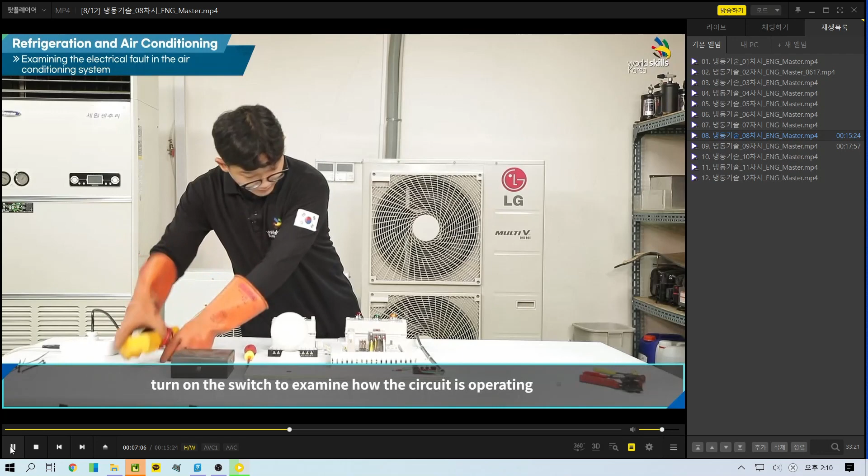Check if there is any electrical leakage at the inner part of the circuit and if the ground connection is properly conducted. After confirming electricity is flowing into the circuit, turn on the switch to examine how the circuit operates. Due to the electrical flow inside the circuit, the equipment must be checked with rubber insulation gloves for the safety of the operator. Check whether the power and operation lamps properly work and the light bulb used for loading on behalf of the motor is operating normally.

The process of finding and repairing the fault: disconnect the power from the main electrical circuit and cut the wires intentionally to open the circuit, causing a failure. At the part where the worker has just cut the wires, the failure is caused by disconnecting the wire that is connected to the magnetic switch.

To check if there occurs any fault in the machine, supply power to it again. When connecting the power, you must wear rubber insulated gloves and conduct the power voltage test. Measure the voltage at the power outlet so that the accurate voltage can be supplied to the 220-volt line and 0-volt line on the diagram.

지금 요 내용을 조금 설명을 좀 드릴게요. 지금 저희 작업자가 자꾸만 플러그, 멀티 콘센트 플러그 계속 여기를 이제 점검하는 장면이 나오는데, 요거는 실질적으로 220볼트가 이제 장비에 투입이 되는지 그거를 이제 확인하기 위한 것이고요. In the video clip, the worker keeps checking the power outlet by conducting the test to see if the 220 volt is applied to the actual system or unit.

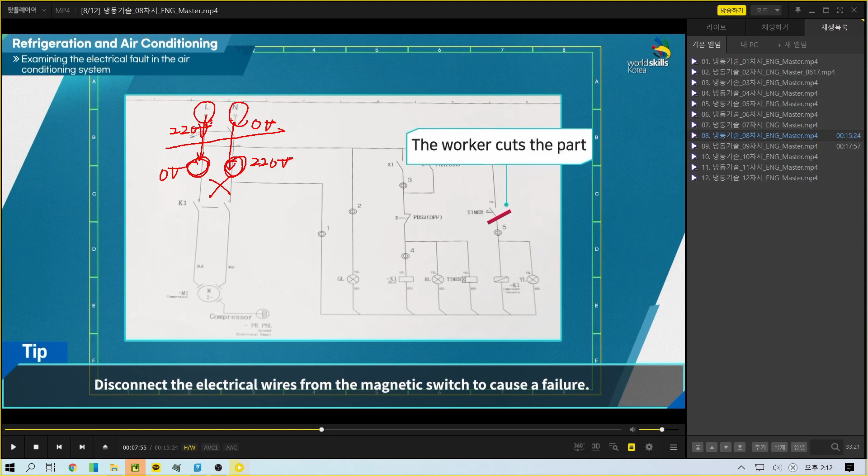This is exactly the part about what I mentioned. 여러분들이 지금 동영상을 보시면서 나레이션 설명하는 거하고 화면하고 조금 정확하게 맞아 들어가지 않고 좀 다른 작업을 하는 것처럼 보이는데 그냥 참고하시면서 편안한 마음으로 보시면 되겠습니다. There is some delay between the actual simulation of the worker in the video clip and the narration or subtitles, so please understand this point when watching the video clip.

네, 다시 진행을 하겠습니다. Let me move to the next step. Before applying power, inspection for leakage and short in the circuit must be conducted using a multimeter.

If you confirm that there is no leakage or short circuit, turn on the switch to check the operation of the circuit. Inspect that the light bulb for loading does not turn on properly, unlike the normal state.

Using a digital multimeter, check which part of the circuit has the problem. Inspect the magnetic switch area first because the bulb is not lit and the magnetic switch is not working. If the voltage is applied to the magnetic switch, but the magnetic switch does not work, it can be identified as a failure of the magnetic switch itself.

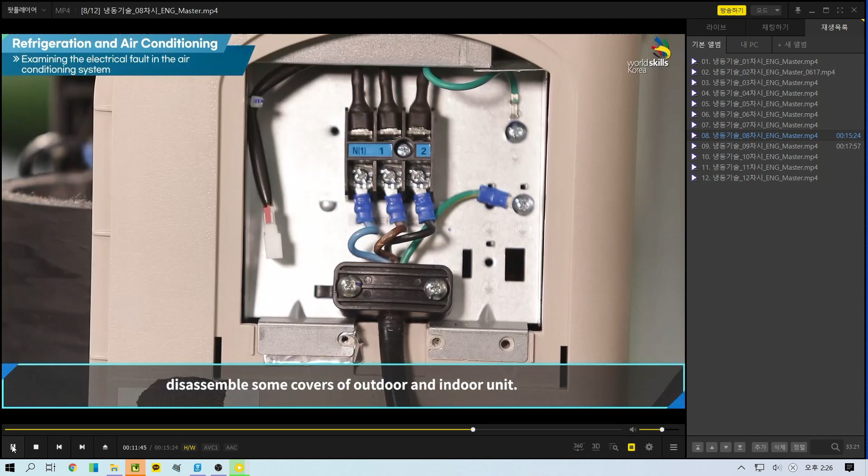To check the diagram and wiring of the air conditioning unit, disassemble some covers of the outdoor and indoor unit. Using a digital multimeter, conduct the continuity test on terminals L and N.

Ground continuity inspection, earth insulation inspection, and interline insulation between L and N phases are conducted sequentially. If the resistance value between the two terminals is abnormal, it can cause fire due to damage of the circuit breaker trip and electrical components breakage or sparks. Therefore, check for any problems before supplying power.

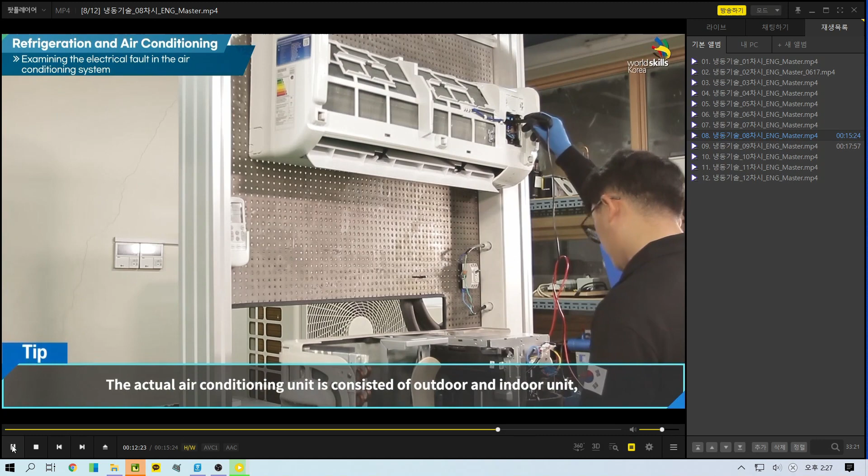The actual air conditioning unit consists of an outdoor and indoor unit, so there is also a communication wire connecting the two. Be sure to inspect not only the main wire of the machine, but also the communication wire.

The refrigeration unit usually consists of several basic control circuits that are operated by their own sequence, which operates following the whole sequence again.

What is a sequential control? It is a control system which proceeds step by step according to a set sequence. If power is supplied with a switch, it operates the load according to the conditions of the auxiliary relay in the circuit or the switch.

If the circuit test is completed, put the covers on the machine again and supply power.

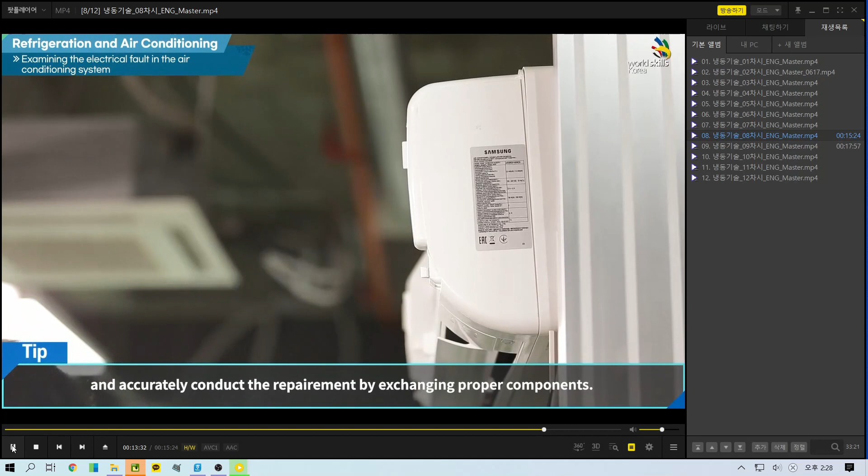Control systems for refrigeration systems and air conditioners are divided into main and auxiliary circuits. If you conduct the design and wiring by distinguishing each circuit part and control part, you can easily find the fault when the control system of the refrigeration unit has a problem, and accurately conduct the repair by exchanging proper components. The actual wiring diagram might use a different operation method and components depending on the designer's intention and purpose. So be sure to understand the control system by checking the wiring diagram provided by the manufacturer.

Before supplying power, make sure to conduct the power voltage test so that the accurate voltage can be provided.

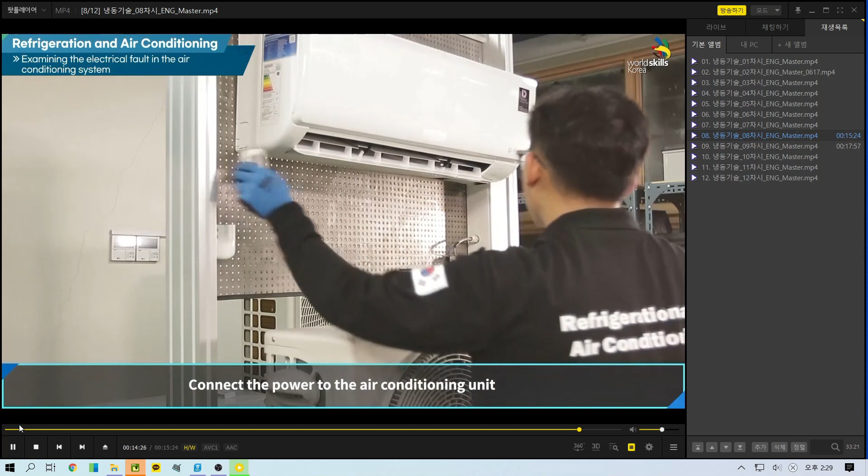Connect the power to the air conditioning unit and operate it to check if it works without any problems.

Main focus of the task in this training is as follows. First, to reduce errors in data, examine the problem with several trials instead of finishing it with a single trial. Second, testing instruments such as digital thermometer must measure the same points during both normal operation and fault finding. Third, when measuring wind speed, it is necessary to measure the wind volume at several places as much as possible, rather than only one place, and to make an average value. Fourth, when installing a manifold gauge, install it where the refrigerant in the hose can be reclaimed. Fifth, after the repair is completed, competitors should always check if the machine operates properly. Sixth, to figure out the reason for the fault, it is necessary to train workers by comparing the normal refrigeration cycle and the refrigeration cycle which has a mechanical fault. Please check the preparations and tools for this training.

These are precautions. First, before repairing the fault, competitors should attach a danger sign at the end of the power cord. Second, since this work deals with the refrigerant, make sure to wear safety gear to prevent low temperature burns.

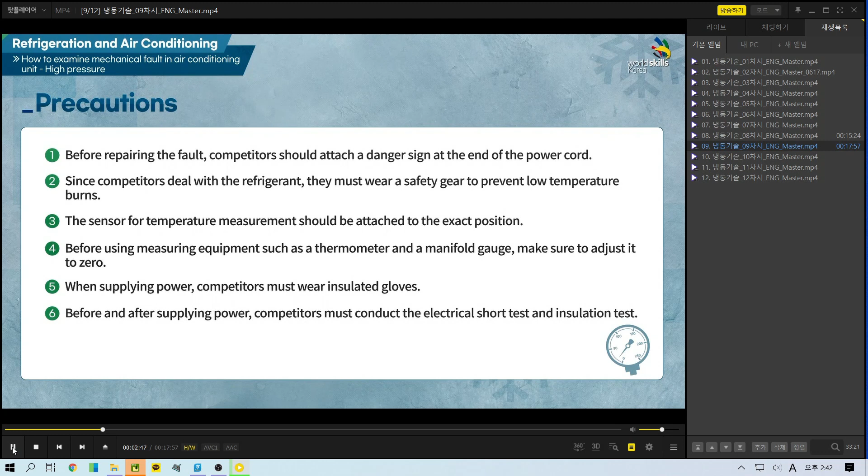Third, the sensor for temperature measurement should be attached to the exact position. Fourth, before using measuring equipment such as a thermometer and a manifold gauge, make sure to adjust it to zero. Fifth, when supplying power, make sure to wear insulated gloves.

Sixth, before and after supplying power, make sure to conduct the electrical short test and insulation test. Seventh, the likely cause of failure is high pressure, so be careful of changes in high pressure. Eighth, operating faulty equipment for a long time to find the fault can lead to additional damage to the machine. Ninth, care must be taken in insulating the sensor parts so that the temperature measurement data values are not affected by external factors.

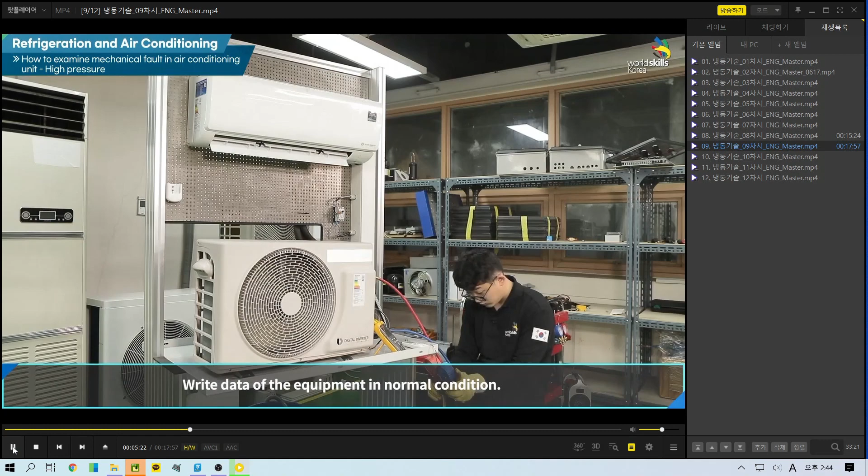Examining the normal operating condition. Write down the data of the equipment in normal condition. Measure and write down the compressor operating current, the air velocity of indoor and outdoor unit, the high and low operating pressure, the superheat, and the subcooling.

When measuring the air velocity of indoor or outdoor unit, divide the inlet or outlet of the indoor or outdoor unit into 4 to 6 sections, and measure the air velocity in each divided section to get an averaged value. If you multiply the average value with the area of the indoor unit, you can get the air volume of the machine.

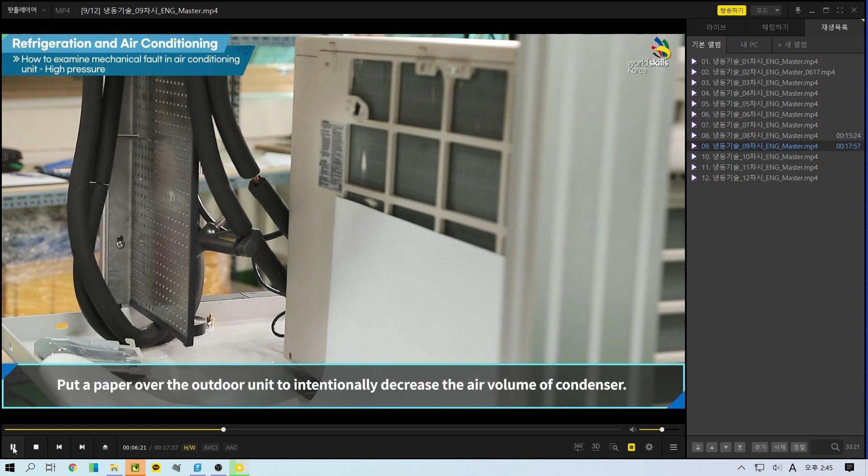The situation of the fault regarding the decreased air volume in condenser. Put a paper over the outdoor unit to intentionally decrease the air volume of the condenser. Check how the data gets changed compared to the data from the normal machine.

There can be several reasons for the decreased air volume of the outdoor unit, but it commonly experiences an abnormal increase in the discharge pressure, which is a high pressure part.

Reasons for the decreased air volume of the outdoor unit: when the motor does not rotate properly because of a functional problem in the motor; when the wing of the fan is damaged; when the fins on the suction side of the outdoor unit are clogged with foreign substances; when the outdoor unit is placed in a problematic location.

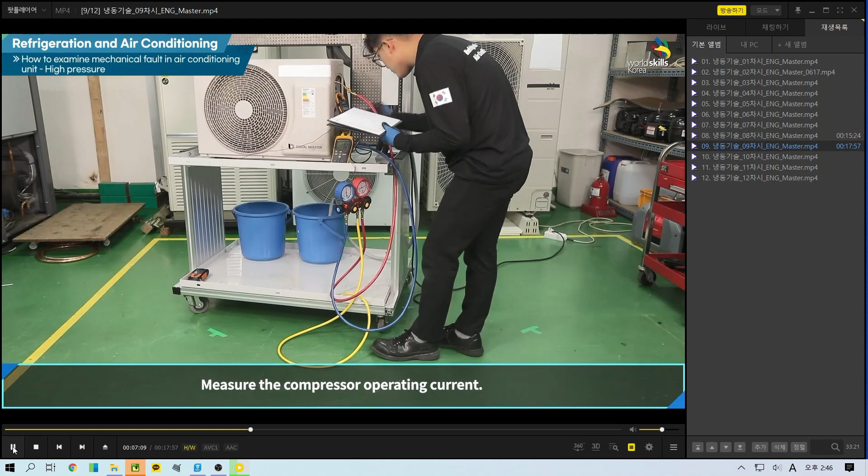Measure the compressor operating current. High pressure rises due to a lack of heat exchange, causing the compressor operating current to rise as well.

If the place where the condenser is installed is not ventilated and has a lot of dust, the contaminants will stick to the refrigerant pipe and cooling fin. In this case, the heat does not exchange, raising the high pressure.

If a leaf or a paper is stuck to the condenser, the heat does not exchange as well. As a result, condensation will not take place well, and the pressure at the high pressure part will increase.

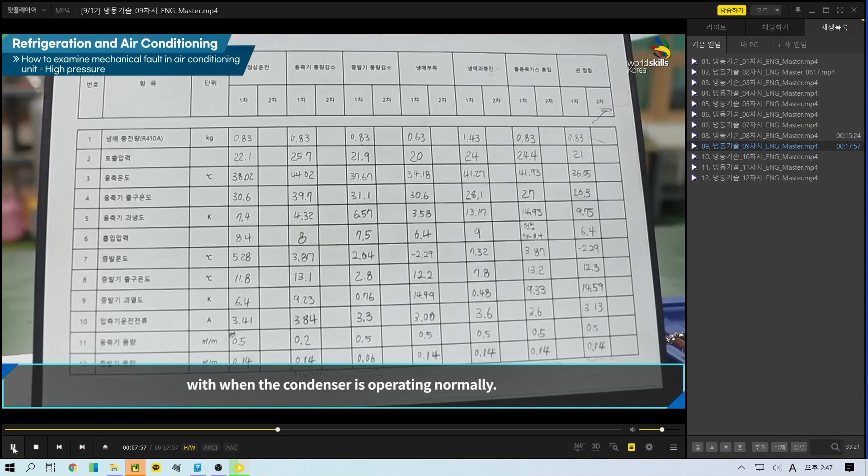Let's compare the data of when the air volume of the condenser is decreased with when the condenser is operating normally. Check for any noticeable changes.

Increase in discharge pressure. Increase in compressor operating current. Decrease in air volume of condenser. No change in the degree of supercooling of the condenser. No change in the degree of superheat of the evaporator.

The reason for the data change is because the heat exchange is not taking place properly at the condenser. The condensing medium of an air-cooled condenser is the air that exchanges heat. If the air volume is not adequate, the condensing efficiency decreases and the discharge pressure increases.

If the condenser is placed close to a wall or any other obstacle, the hot air discharged after the heat exchange gets sucked in again, making the heat exchange ineffective.

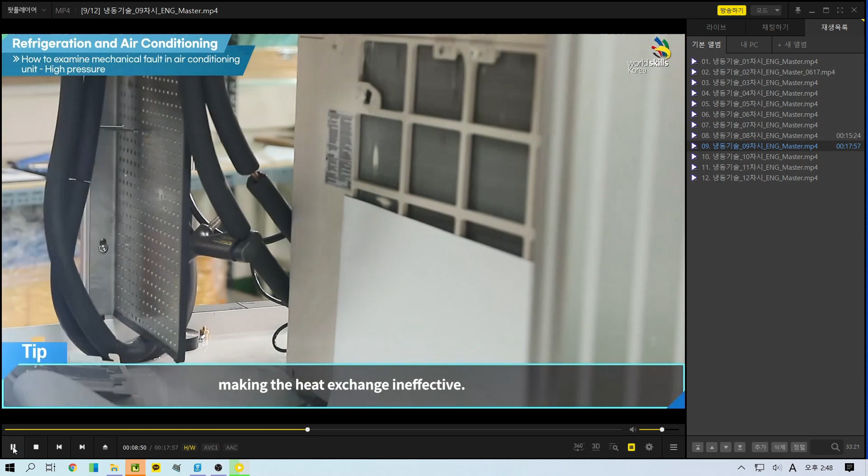When there occur symptoms such as the increase in discharge pressure, the increase in operating current, and the decrease in the air volume of the condenser, contamination in the condenser or faulty condensation is assumed to be the reason for the fault. In this case, there is no change in the degree of supercooling of the condenser and the degree of superheat of the evaporator.

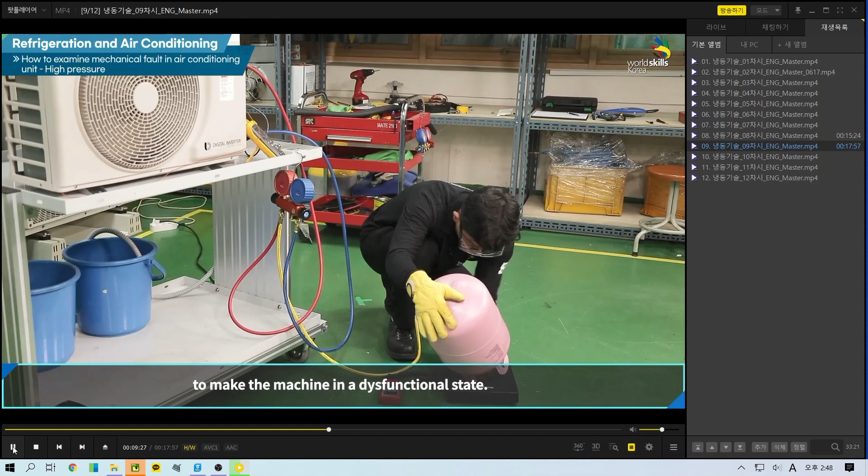The situation of the fault regarding refrigerant overcharging. Overcharging the refrigeration system with refrigerant intentionally makes the machine dysfunctional. The overcharged amount of refrigerant is 600 grams.

Check how the data gets changed compared to the data from the normal machine. Measure the discharge pressure and the suction pressure during operation. If the refrigerant is overcharged in a refrigeration cycle, the discharge pressure gets abnormally high.

Measure the temperature of the condenser outlet. Although the temperature dropped only a little bit, the degree of supercooling changes considerably due to the change in discharge pressure. Measure the compressor operating current.

The operating current is higher than normal.

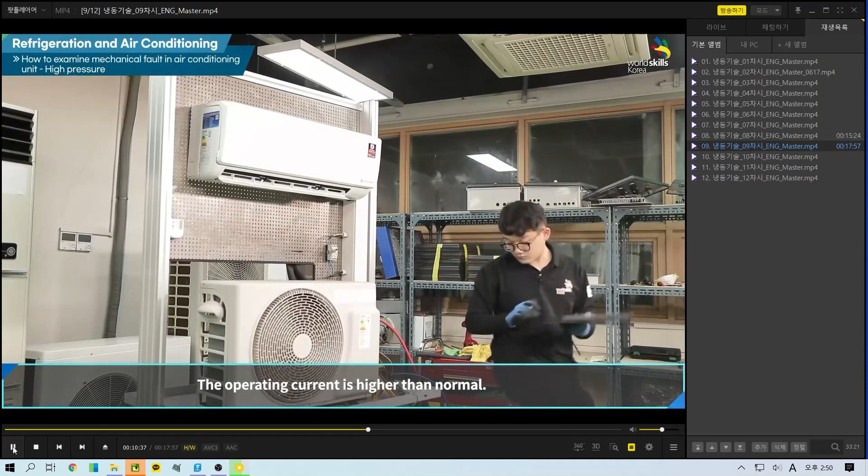Let's compare the data of when refrigerant is overcharged with when the machine operates normally. Check for any noticeable changes. Refrigerant is overcharged 600 grams more than the normal amount.

Increase in discharge pressure. Increase in the degree of supercooling of condenser. Decrease in superheat of evaporator. Increase in compressor operating current. Normal air volume of the condenser.

It is because of the excessive amount of liquid refrigerant that had accumulated on the condenser, decreasing the capacity of the condenser. It is because the part of the condenser where the liquid refrigerant is filled cannot work properly as a condenser. Therefore, when the subcooling increases excessively, the liquid refrigerant which was unable to be evaporated keeps flowing into the compressor.

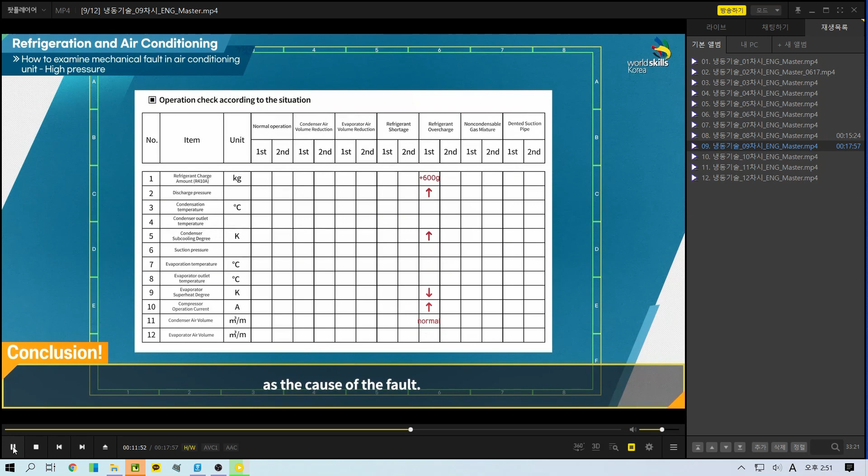When there occurs symptoms such as the increase in discharge pressure, the increase in subcooling of condenser, the decrease in superheat of evaporator, and the increase in compressor operating current, the refrigerant overcharging is assumed as the cause of the fault. In this case, there is no change in the air volume of the condenser.

The situation of the fault regarding the mixed-in non-condensable gas. Inject some nitrogen gas into the refrigeration system intentionally to make it in a dysfunctional state.

When non-condensable gases such as air are collected in the condenser during piping, the condensation volume of the condenser is reduced due to the non-condensable gases, which results in higher discharge pressure than the pressure corresponding to the condensation temperature of the refrigerant vapor. Check how the data gets changed compared to the data from the normal machine.

While the machine is operating, measure the discharge pressure, the temperature of condenser outlet, the suction pressure, the temperature of evaporator outlet, the compressor operating current, and the air volume of both condenser and evaporator using a manifold gauge.

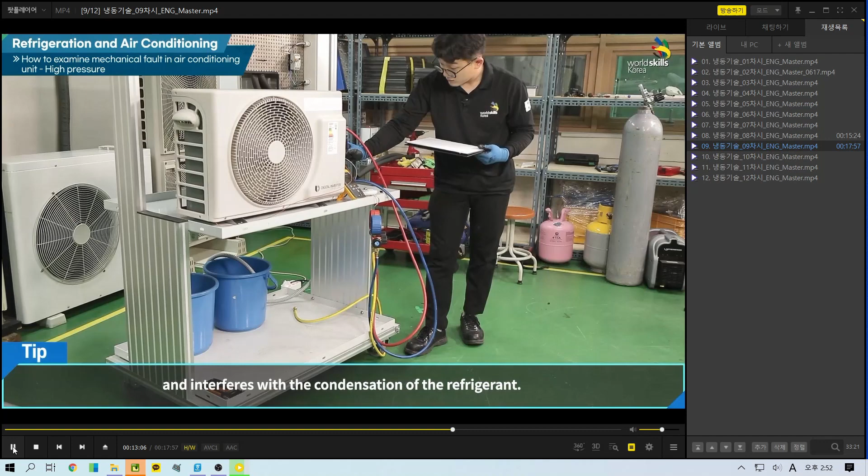Why non-condensable gas can cause some problem. It is because non-condensable gas gathers at the upper part of condenser and interferes with the condensation of the refrigerant. If the amount of non-condensable gas increases, the heat exchanging area decreases, hindering the heat exchange efficiency and the condenser's performance.

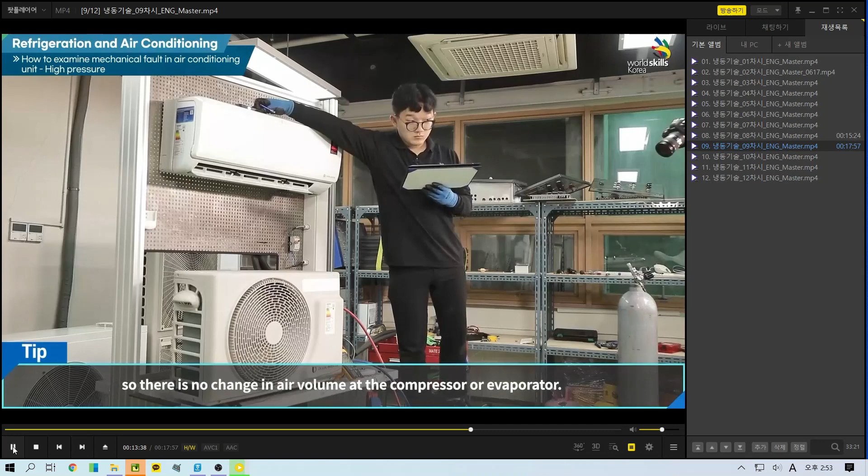Therefore, it can be the cause of decreasing the refrigerating ability since it increases the condensing pressure, increasing the shaft power of compressor as well. However, there is no obstruction at the part where the wind goes out, so there is no change in air volume at the compressor or evaporator.

Let's compare the data of when some non-condensable gas is mixed in with when the machine is operating normally. Check for any noticeable changes. Increase in discharge pressure. Increase in subcooling of condenser.

Suction pressure hunting phenomenon. Increase in superheat of evaporator. Increase in compressor operating current. No change in the air volume of the condenser.

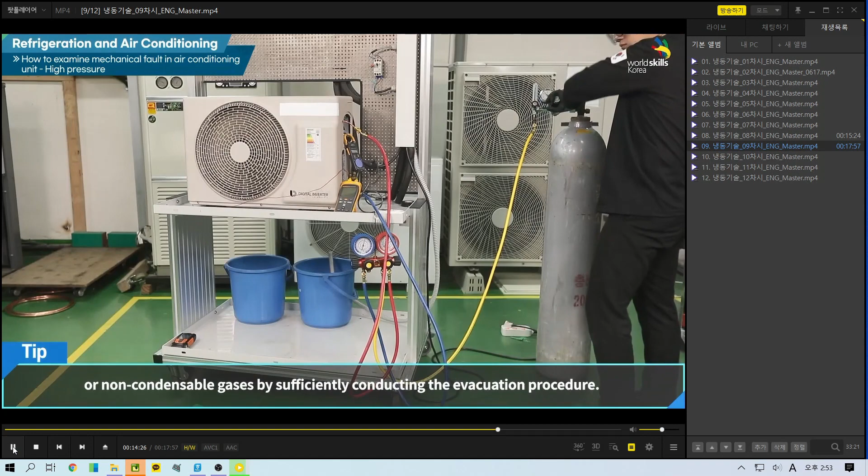To prevent some non-condensable gases from being mixed in, seal the refrigerant piping system properly and make sure there is no remaining air or non-condensable gases by sufficiently conducting the evacuation procedure. When the refrigerant is being charged, be careful so that no air or moisture is mixed in.

When there occurs symptoms such as the increase in discharge pressure, the increase in subcooling of condenser, the suction pressure hunting phenomenon, the increase in superheat of evaporator, and the increase in compressor operating current, the mixed-in non-condensable gas is assumed as the cause of the fault. In this case, there is no change in the air volume of the condenser.

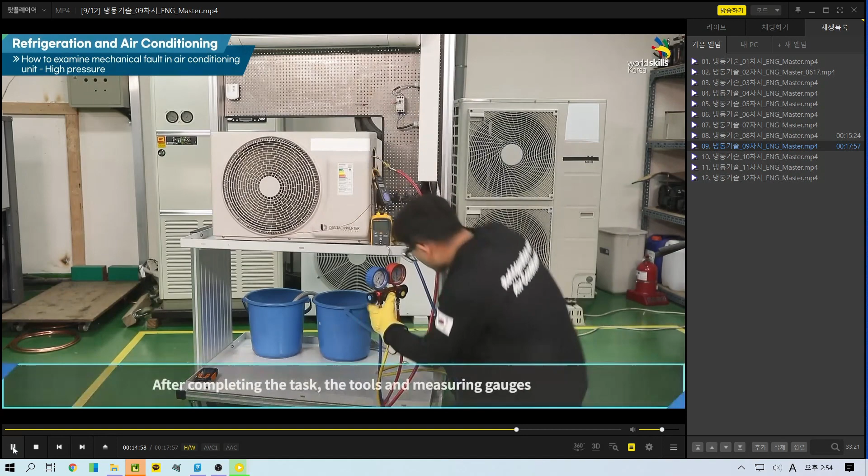After completing the task, the tools and measuring gauges used for examining and repairing the fault should be removed. All sorts of covers or caps that were disassembled, such as a pressure controller and joint box, should be reassembled to the original state.

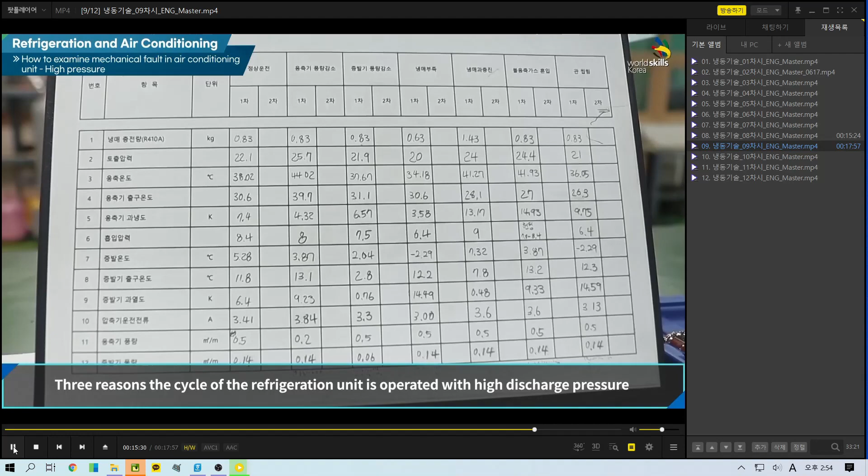We have reviewed 3 reasons the cycle of the refrigeration unit is operated with high discharge pressure. There are three main reasons why the cycle of the refrigeration unit is operated with high discharge pressure: decreased air volume of condenser, refrigerant overcharging, and mixed-in non-condensable gas.

There are differences in the measured data depending on the three reasons above. If the condenser air volume decrease is the cause, it shows problems such as increase in discharge pressure, increase in compressor operating current, and decrease in air volume of condenser. No change in the degree of supercooling of the condenser. No change in the degree of superheat of the evaporator.

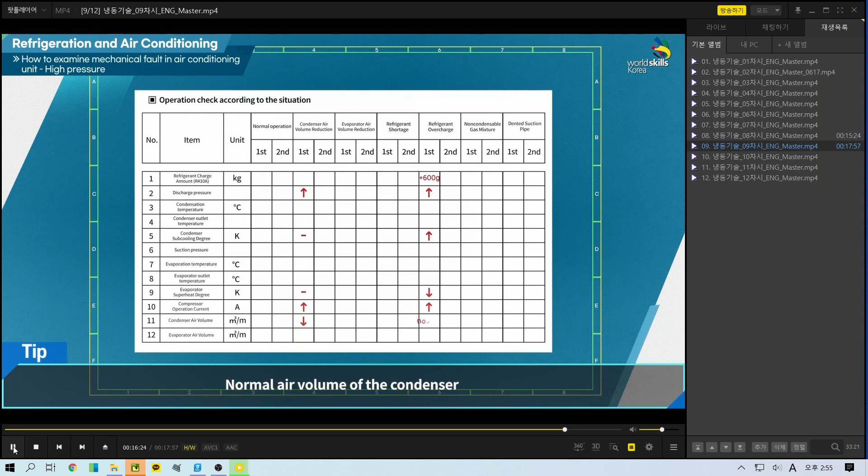When the refrigerant is overcharged: increase in discharge pressure, increase in subcooling of condenser, decrease in superheat of evaporator, increase in compressor operating current, but the air volume of condenser is normal. When some non-condensable gas is mixed in: increase in discharge pressure, increase in subcooling of condenser, suction pressure hunting phenomenon, increase in superheat of evaporator, increase in compressor operating current, no change in the air volume of the condenser.

Even if the discharge pressure is high, there can be a difference in the specific data depending on the situation. In order to quickly find the fault and its reason, it is necessary to understand the problems that occur according to situations and to be trained repeatedly by comparing the difference in the measured data.

After checking the data sheet on the video screen, I'm going to give you additional explanation on it.

As shown in the table, first we have the normal condition data. The first part of the data sheet is about the normal operating conditions, and it is going to be measured 2 times.

I recommend following the procedure from the left section to the right section. Before dividing the faults depending on the high pressure change or the low pressure change, during training I recommend you follow this procedure from left to right.

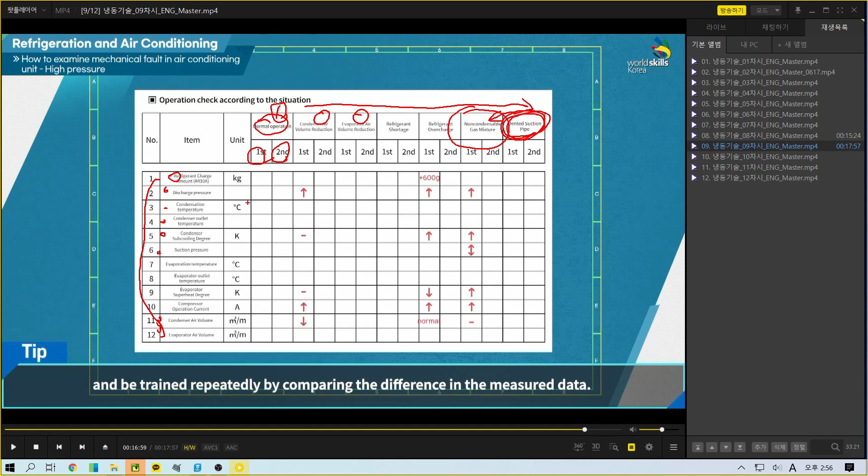So from the top to the bottom, it's all about the discharge pressure, suction pressure, and air volume, etc. Please check all the contents of the items I just marked on the data sheet, and then add some items or delete some items if you need to design the unique individual data sheet for the training.

Now let's finish with the high pressure section and move on to the low pressure section. Let us finalize the fault finding parts of the high pressure part.

Since the low pressure section overlaps a lot with the high pressure section in the beginning - the procedures and precautions repeat - we'll skip ahead to the low pressure part. So now it is about the fault finding task of the low pressure part, but there is a lot of repeated content similar to what you just saw in the previous video clip, so I'm going to skip a few parts.

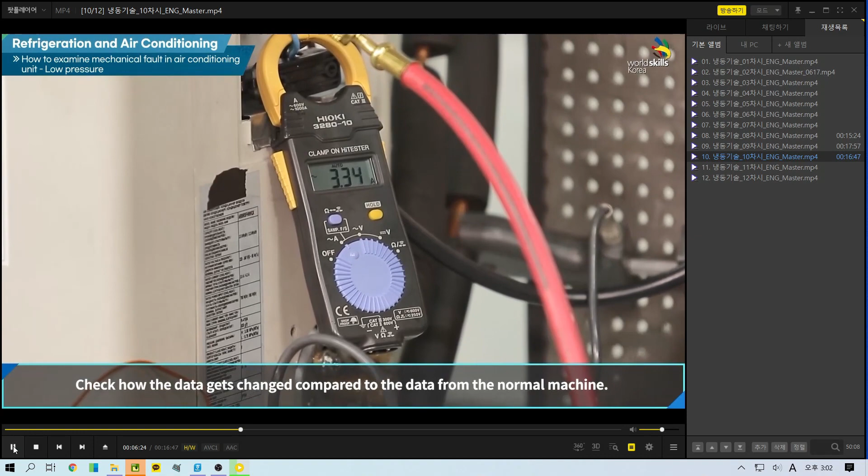Measure and write down the compressor operating current, the air velocity of indoor and outdoor unit, the temperature of evaporator outlet, the temperature of condenser outlet, the high and low operating pressure, the superheat, and the subcooling.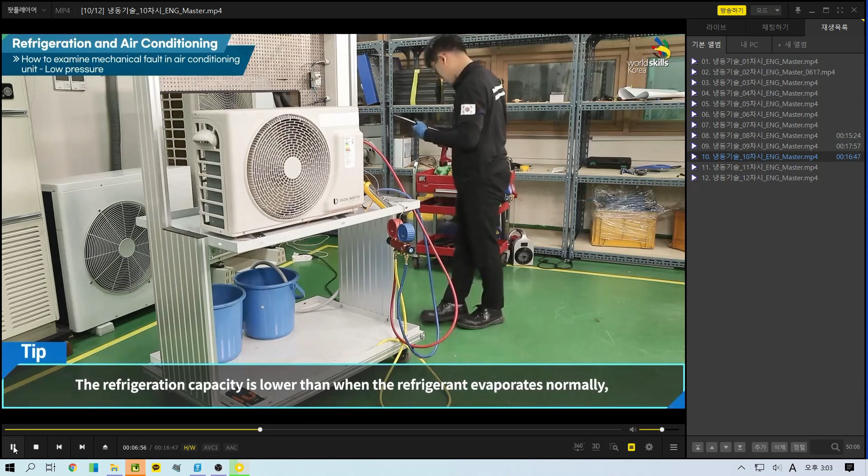If the air volume through the evaporator is abnormally insufficient, the refrigerant flowing in the coil will not evaporate properly. The refrigeration capacity is lower than when the refrigerant evaporates normally, and the refrigerant that is not evaporated is inhaled to the compressor side, which causes failure.

There are many reasons that reduce the air volume of evaporator. First, there is a case where the air filter or evaporator on the suction side of the indoor unit has foreign substances or dust, decreasing the air volume. In addition, there is a case where the evaporator is not operating in normal RPM because of the broken motor. There is a case where the wing of fan is broken. And there is a case where objects interfere with the airflow in the inlet and outlet of the indoor unit.

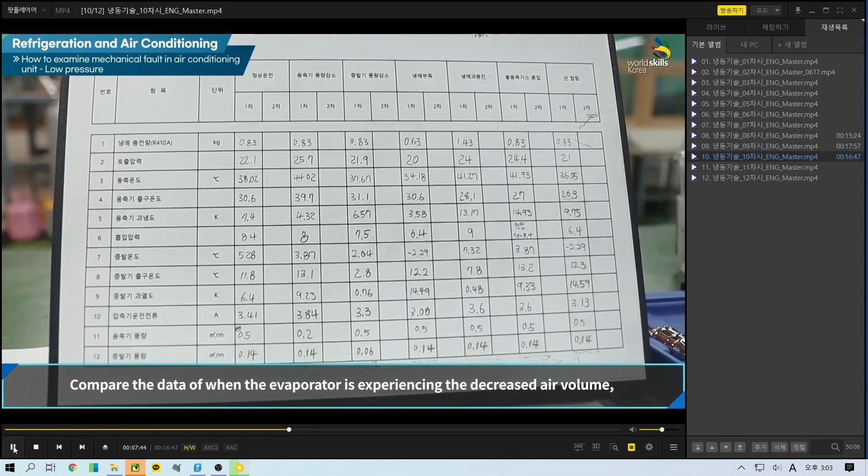Therefore, when the evaporator is experiencing decreased air volume, make sure to measure the air volume. Let's compare the data of when the evaporator is experiencing decreased air volume with when the machine is operating normally. Let's check for any noticeable changes.

Decrease in suction pressure. Decrease in superheat of evaporator. Decrease in air volume of evaporator. Decrease in subcooling of condensers. Decrease in operating current. The reason for the data change is because the heat exchange is not taking place properly

at the indoor unit. Therefore, make sure to conduct overhauls and maintenance on the machine thoroughly to prevent the blockage in air filter and the contamination in refrigerant pipe and cooling fin of the evaporator, and to make evaporator fans

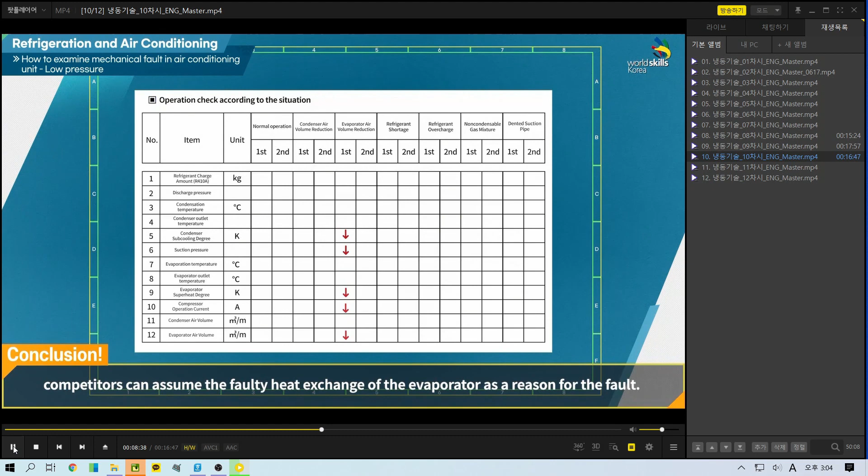operate properly. When there occur symptoms such as the decrease in suction pressure, the decrease in superheat of evaporator, and the decrease in air volume of evaporator, the faulty heat exchange of the evaporator is assumed to be the reason for the fault.

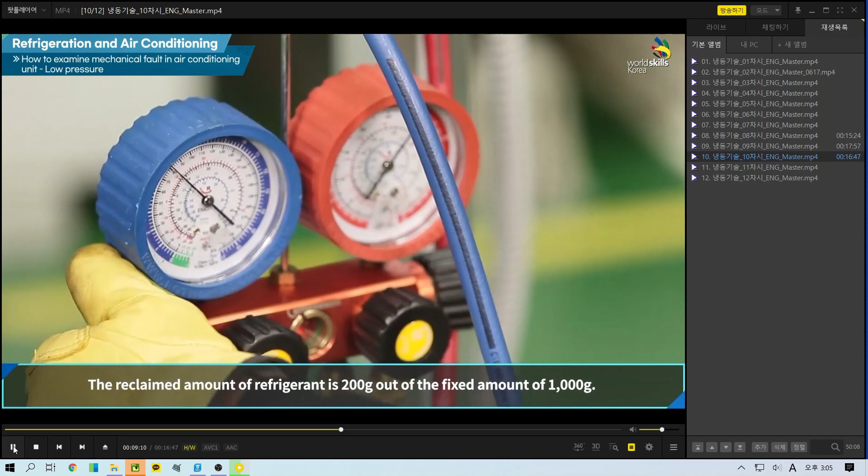This is a malfunction due to insufficient refrigerant. Reclaim the refrigerant from the refrigeration system intentionally to make it in a dysfunctional state. The reclaimed amount of refrigerant is 200 grams out of the fixed amount of 1,000 grams. Check how the data gets changed compared to the data from the normal operation.

Measure the compressor operating current, the temperature of evaporator outlet, the temperature of condenser outlet, the high and low operating pressure.

Insufficient refrigerant may result in a decrease in both suction and discharge pressure. In addition, the increasing superheating degree of the system causes compressor failure due to overheating and deterioration of the freezing capacity. Measure and record the air velocity of the indoor and outdoor units.

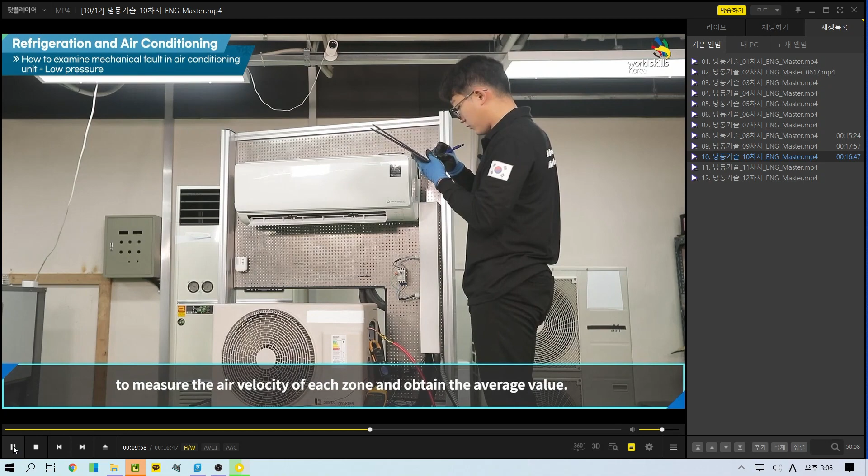When measuring air velocity, the air inlet or outlet of the indoor and outdoor units shall be divided into 4 to 6 equal parts to measure the air velocity of each zone and obtain the average value. Let's compare the actual value of when there is a lack of refrigerant with when the machine operates normally. Check for any noticeable changes.

The reclaimed amount of refrigerant is 200 grams. Decrease in discharge pressure. Decrease in subcooling of condenser. Decrease in suction pressure. Increase in superheat of evaporator. Decrease in compressor operating current.

When there is a lack of refrigerant of refrigeration equipment, as well as the measured data, if a sight glass is installed, bubbles are visible in the liquid refrigerant.

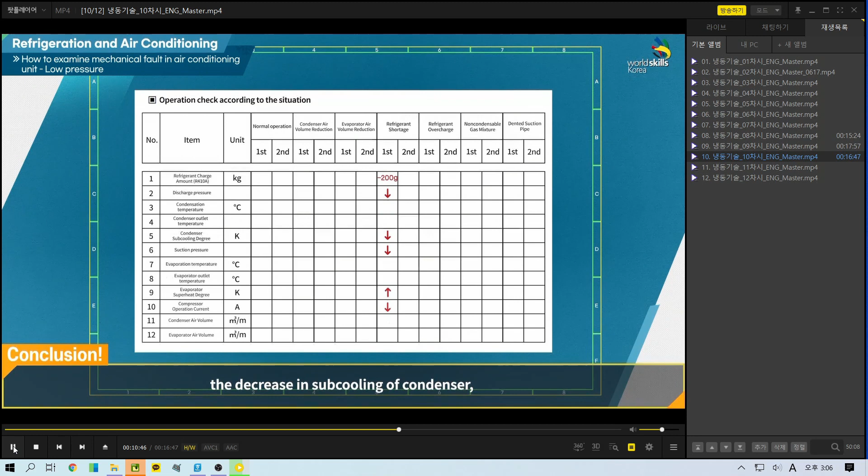Therefore, when there occur symptoms such as the decrease in discharge pressure, the decrease in subcooling of condenser, the decrease in suction pressure, the increase in superheat of evaporator, and the decrease in compressor operating current, the lack of refrigerant is estimated to be a reason for the fault.

This is the situation where the pipe is dented. Distort the pipe of the refrigeration equipment intentionally to make it in an abnormal dysfunctional state where the refrigerant flow is hindered.

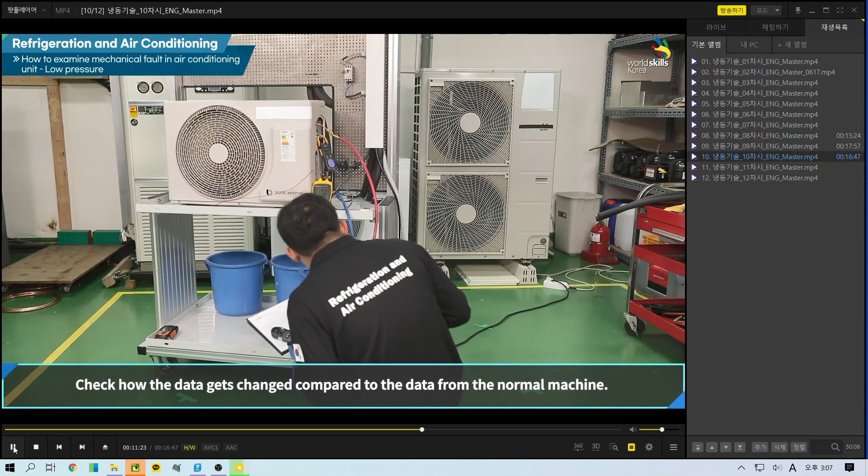Check how the data gets changed compared to the data from the normal machine. Measure discharge pressure and suction pressure during operation. If the refrigeration circulation is hindered, only a small portion of the refrigerant goes through the evaporator, resulting in lower suction pressure.

Measure the temperature of evaporator outlet and the temperature of condenser outlet. When the filter dryer in the liquid tube is blocked, the outlet temperature is lower than the inlet temperature due to the difference in pressure between the inlet and outlet of the filter dryer. Similar problems occur when the liquid line is blocked or bent.

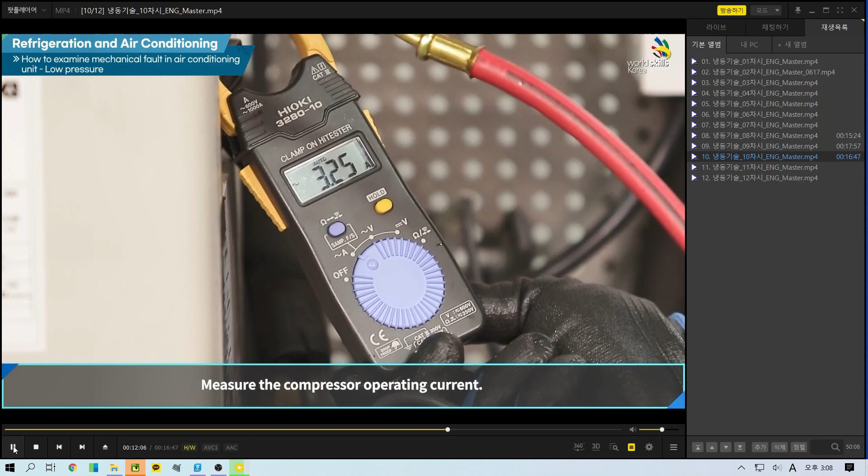Measure the compressor operating current. If the refrigerant does not flow smoothly, the pressure at the low pressure part gets low, which causes the low pressure controller to operate and stops the refrigeration equipment.

Measure and write down the air velocity of the indoor and outdoor unit. When measuring the air velocity, divide the air conditioning unit into 4 to 6 sections, measure each section, and calculate the average value.

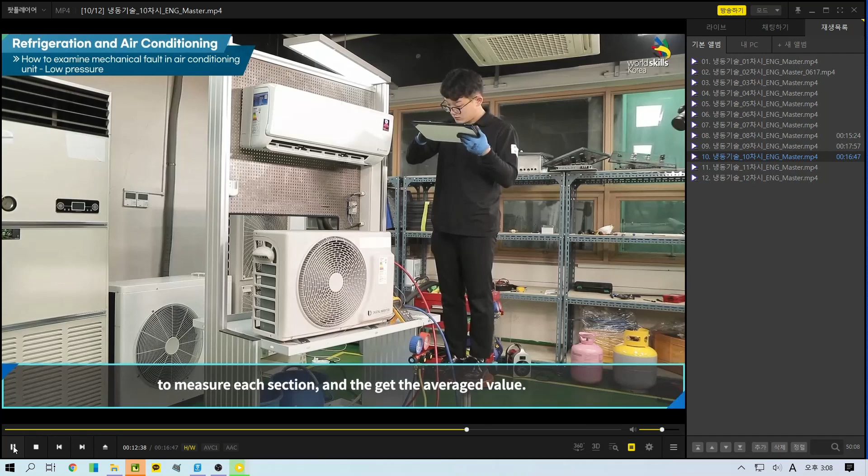Let's compare the data of when the pipe is dented with when the machine operates normally. Check for any noticeable changes.

Little decrease in discharge pressure. Little increase in subcooling of condenser. Decrease in suction pressure. Increase in superheat of evaporator.

The reason for the data change is because the refrigerant circulation is hindered. Only a small portion of the refrigerant circulates, resulting in lower suction pressure. The superheating changes as the evaporation process becomes shorter and the suction pressure decreases.

Therefore, when there occur problems such as little decrease in discharge pressure, little increase in subcooling of condenser, decrease in suction pressure, and increase in superheat of evaporator, the dented pipe is estimated to be the reason for the fault.

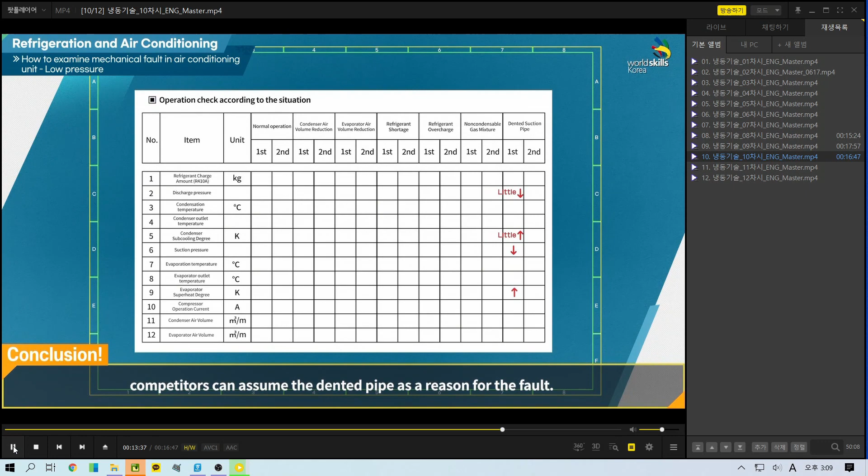After completing the task, the tools and measuring gauges used for examining and repairing the fault should be removed. All sorts of covers or caps that were disassembled, such as the pressure controller and joint box, should be reassembled to the original state.

We have reviewed 3 causes of failure operated under low suction pressure up to now. The reasons why the suction pressure in a refrigeration unit gets lower come from failures of piping such as decreased air volume in evaporator, a lack of refrigerant, or a dented pipe. In addition, there may be several other causes such as valve lock, expansion valve lock, or failure.

These are differences in the measured data depending on the 3 reasons above. When decrease in air volume of evaporator is the reason, symptoms such as decrease in suction pressure, decrease in superheat of evaporator, and decrease in air volume of evaporator may appear.

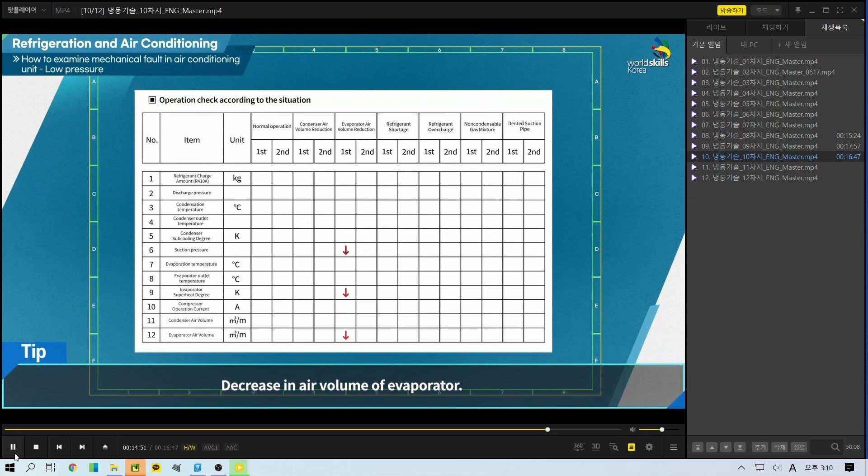When lack of refrigerant is the cause, symptoms such as decrease in discharge pressure, increase in discharge gas temperature, decrease in subcooling of condenser, decrease in suction pressure, increase in superheat of evaporator, and decrease in compressor operating current may appear.

When the defective piping system, such as a dented pipe, is the cause, symptoms such as little decrease in discharge pressure and little increase in subcooling due to changes in condenser pressure, decrease in suction pressure, and increase in superheat of evaporator may appear.

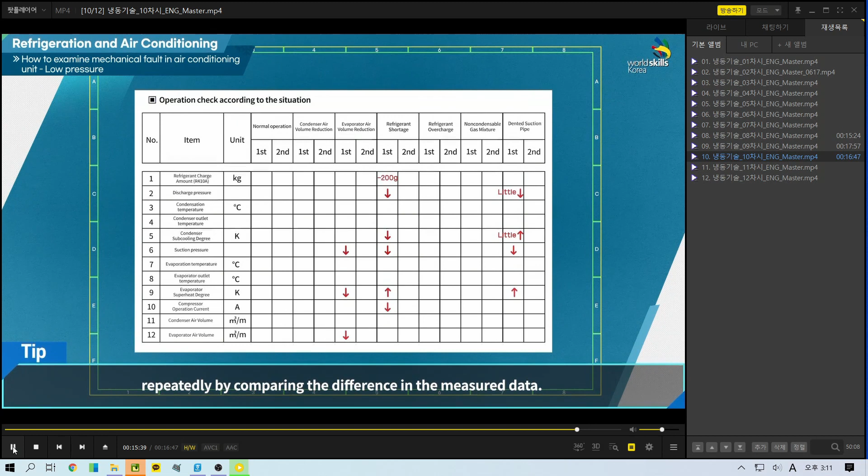Even if the suction pressure is low, there can be a difference in the specific data depending on the situation. In order to quickly find the fault and its reason, it is necessary to understand the problems that occur according to situations and to be trained repeatedly by comparing the difference in the measured data.

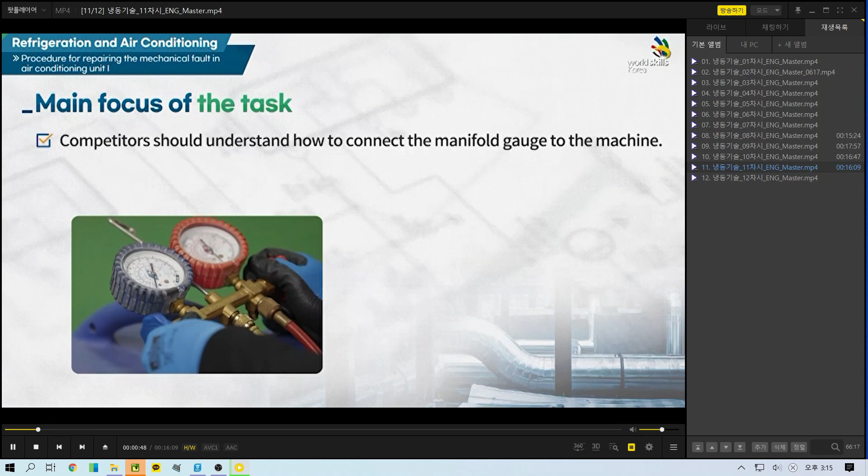Main focus of the task in this training is as follows. First, before brazing the pipe for the repair, you should be able to reclaim the refrigerant charged into the machine. Second, before reclaiming the refrigerant, you should be able to conduct the evacuation procedure on the refrigerant recovery machine. Third, you should be able to understand how to connect the manifold gauge to the machine.

Fourth, you should be able to understand how to connect and use the refrigerant recovery machine. Fifth, you should be able to understand the procedure for reclaiming the refrigerant. Sixth, the weight of the reclaimed refrigerant should be measured. Seventh, the leakage test should be conducted in all connecting parts before, during, and after the refrigerant recovery.

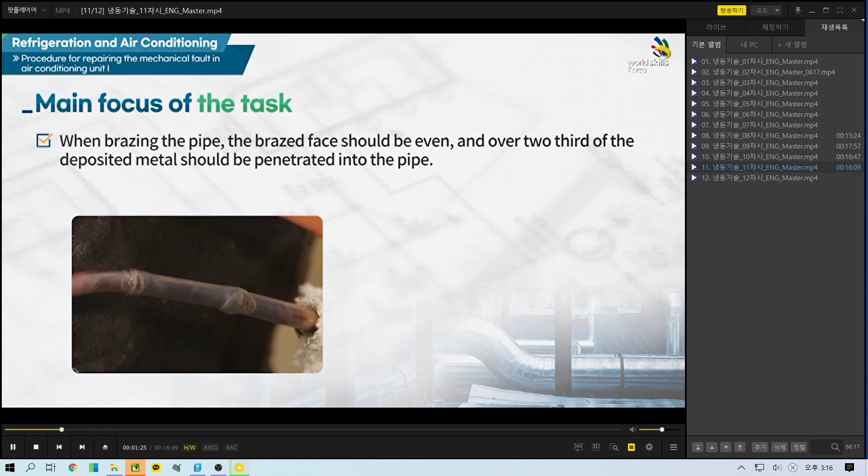Eighth, brazing should be made according to the brazing standards. Ninth, when brazing the pipe, the brazed face should be even, and over two-thirds of the deposited metal should be penetrated into the sufficiently expanded connection part. Tenth, the leakage test of the oxygen welder should be conducted before brazing.

Eleventh, when igniting the flame, be careful not to cause any black smoke. Twelfth, you should be able to know how to control the intensity of the flame with a neutral flame. Thirteenth, when the torch flame is strong, make sure the copper tube is not melted down.

Please check the preparations and tools for this training.

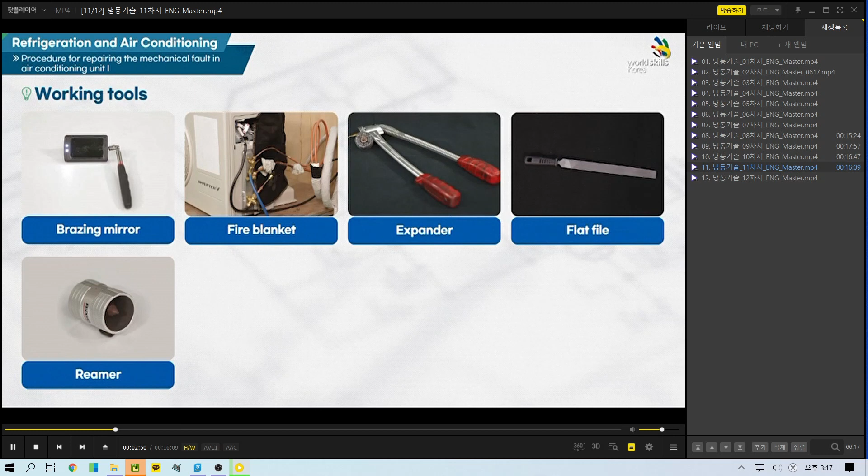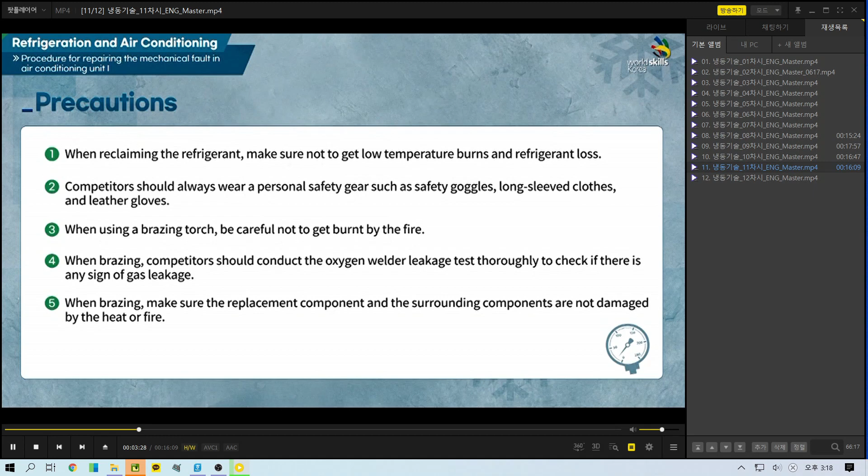Fourth, when brazing, make sure to conduct the oxygen welder leakage test thoroughly to check if there is any sign of gas leakage. Fifth, when brazing, make sure the replacement component and the surrounding components are not damaged by the heat or fire. Sixth, after using the brazing torch, make sure to close the gas valve and discharge the remaining gas inside the hose. Seventh, make sure not to get burnt by the heated copper tube after brazing it.

Eighth, conduct the leakage test on the replacement component by pressurizing nitrogen to check if there is any sign of leakage. Ninth, make sure to install the replacement component in the right direction.

So far we just checked the key points and some precautions we need to care about when conducting the repairment, the fault task.

Now let us move to the next step about how to reclaim the refrigerant from the system in actual practice. Let's watch it together.

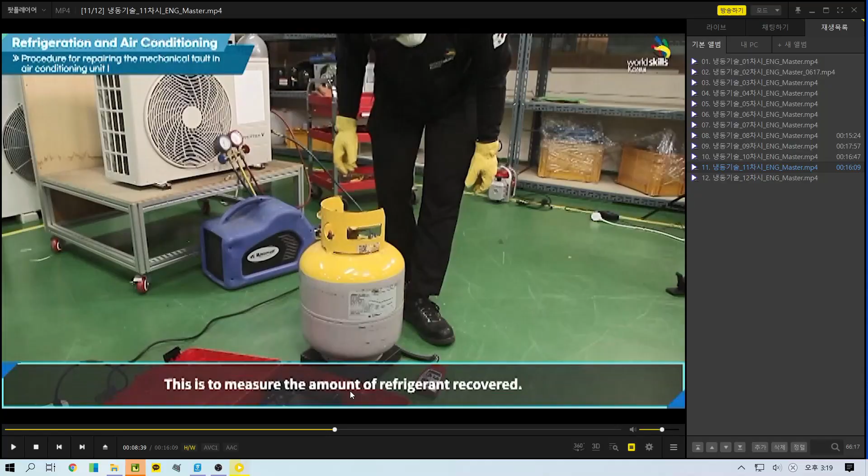This is to measure the amount of refrigerant recovered. After completing the measurement, put down the recovery cylinder and put away the refrigerant scale.

Before reclaiming the refrigerant from the refrigeration system, evacuate the refrigerant recovery machine, recovery cylinder, and the manifold gauge hose. The reason for evacuation work is to remove the non-condensing gas and moisture inside the recovery machine and the recovery container. Open all valves of the manifold gauge connected to the refrigerant recovery machine and the recovery cylinder.

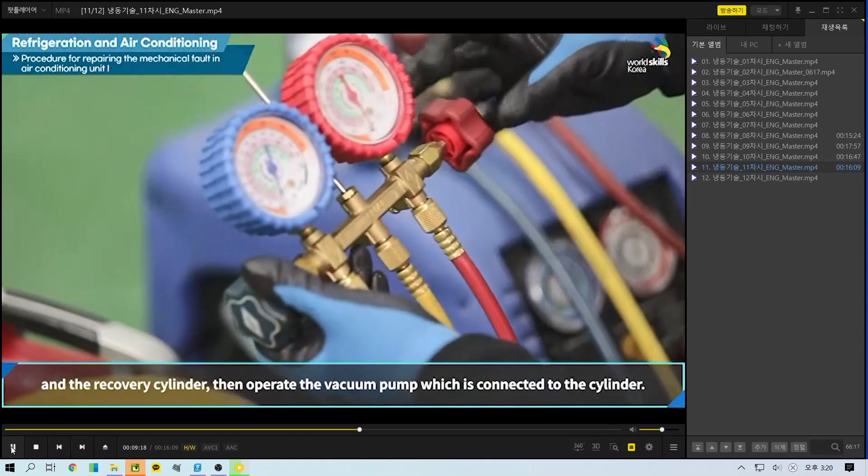Then, operate the vacuum pump which is connected to the cylinder. It is possible to evacuate each equipment separately, but evacuating all at once reduces time.

After completing evacuation in accordance with the operating standards presented to the operator, close the valve of the recovery container connected to the vacuum pump. Then, stop and remove the vacuum pump.

If the refrigerant recovery machine and the recovery cylinder are evacuated separately, connect the low-pressure hose of the manifold gauge to the evacuated refrigerant recovery container and the refrigerant recovery machine sequentially. When the connection is completed, the non-condensing gas inside the manifold gauge hose should be purged before full refrigerant recovery.

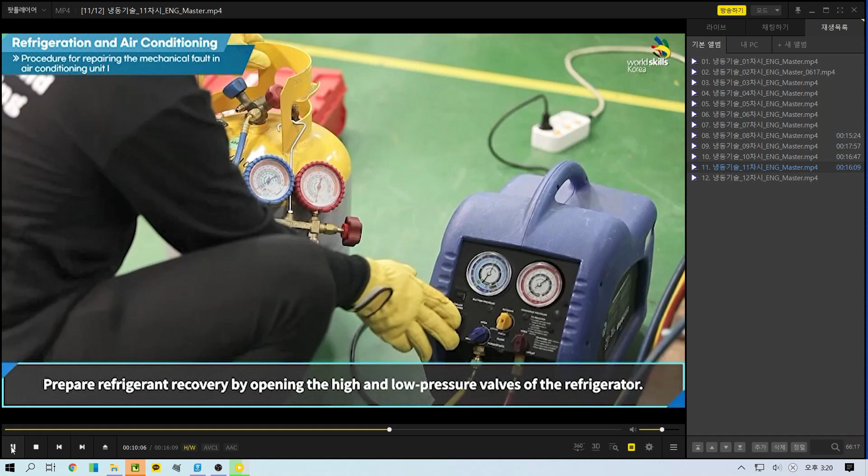Prepare refrigerant recovery by opening the high and low pressure valves of the refrigerator. If the refrigerant is overcharged, the discharging pressure increases abnormally, causing the overcurrent relay or high pressure controller to operate and stop the refrigeration system. When the refrigerant is charged, make sure not to overcharge it to prevent this.

If it has already been overcharged like this time, reclaim all refrigerant inside the refrigeration system and charge it with the adequate amount of new refrigerant.

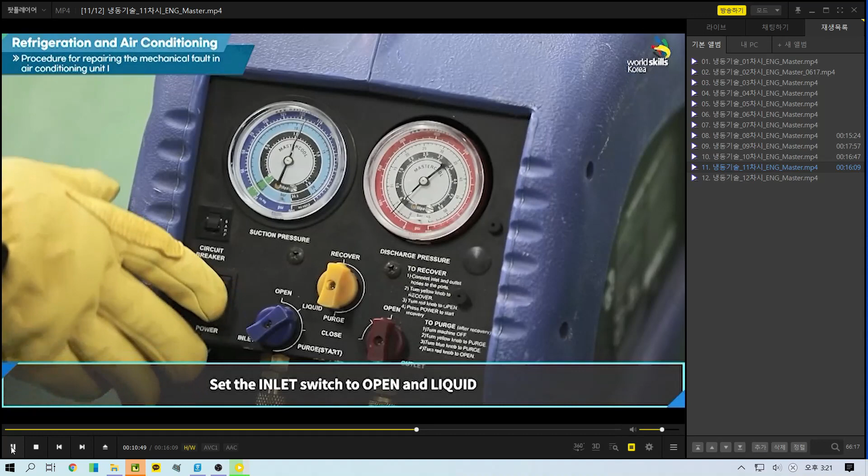Since the refrigerant is defined as an environmental pollutant, make sure to be especially attentive when dealing with it. Set the inlet switch to open and liquid according to the circumstances and retrieve refrigerant in the unit. The purge switch must be placed in the recover state and the outlet valve must be set to open to recover the refrigerant in the unit.

To recover the liquid refrigerant, first place the switch on the inlet side of the recovery device panel on liquid and open the high-pressure valve of the manifold gauge to recover the liquid refrigerant.

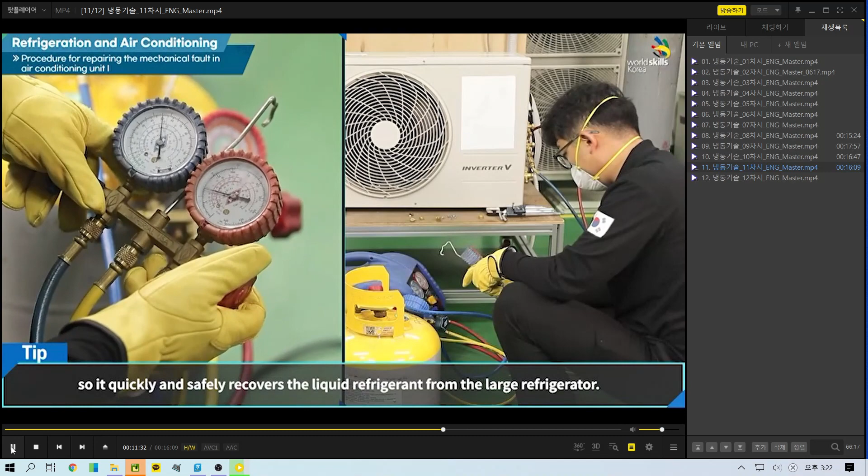What is a push-pull method of refrigerant recovery? The recovery machine inhales gas refrigerant from the recovery container to make high-pressure discharge gas, and the high-pressure gas pushes the liquid refrigerant from the refrigerator to the recovery container. So it quickly and safely recovers the liquid refrigerant from the large refrigerator. It also helps prevent the freezing of water-cooled refrigerators.

When the liquid refrigerant is recovered, change the switch on the inlet of the recovery panel from liquid to open. The manifold gauge low-pressure side valve is also open to simultaneously recover the high and low-pressure refrigerant of the refrigerator. The reason to reclaim the gas refrigerant after the liquid refrigerant is claimed is because it is the most effective and quickest way. The process for reclaiming the refrigerant only in vapor state takes a long time.

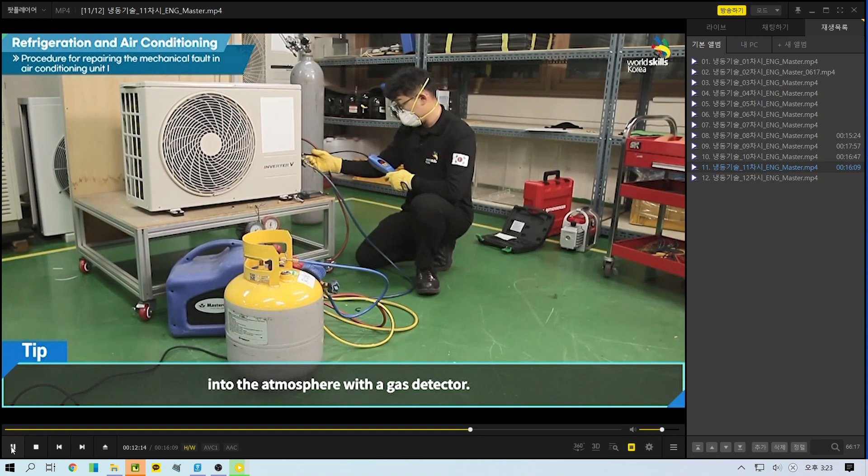During the process of recovering refrigerant, check whether there is any gas leakage into the atmosphere with a gas detector. With a gas detector, you can conveniently detect even a small amount of leakage. If it is placed on a leaking part, the light or the alarm is activated. Check for leakage without leaving out the connection of the refrigerator, manifold gauge, and the connection between the recovery machine and the recovery container.

When recovering the liquid refrigerant, it is possible to work while looking at the sight glass. If the liquid refrigerant is no longer visible on the sight glass, the liquid refrigerant recovery is completed, so the remaining gas refrigerant is recovered afterward.

After refrigerant recovery is completed, turn off the recovery machine and wait for a moment because the remaining refrigerant in the refrigerator can vaporize and cause the pressure to rise. Wait 2 to 3 minutes to see if the pressure in the refrigerator is rising. When the pressure in the refrigerator rises, operate the recovery machine again to recover all evaporated refrigerants. Repeat this task 2 to 3 times.

When the blue low-pressure gauge of the manifold gauge indicates 0, close all manifold gauge valves and stop the operation of the recovery machine.

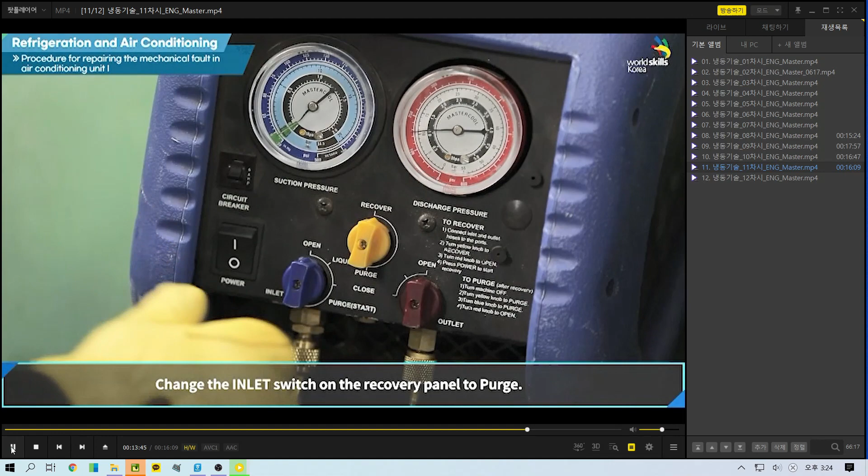Change the inlet switch on the recovery panel to purge. The low-pressure gauge attached to the recovery machine shows that the value increases from 0. Change the recovery switch of the recovery machine to purge. Purge operation is to send all refrigerant left in the recovery machine to the recovery container. It can be seen that the low gauge level of the recovery machine is falling quickly.

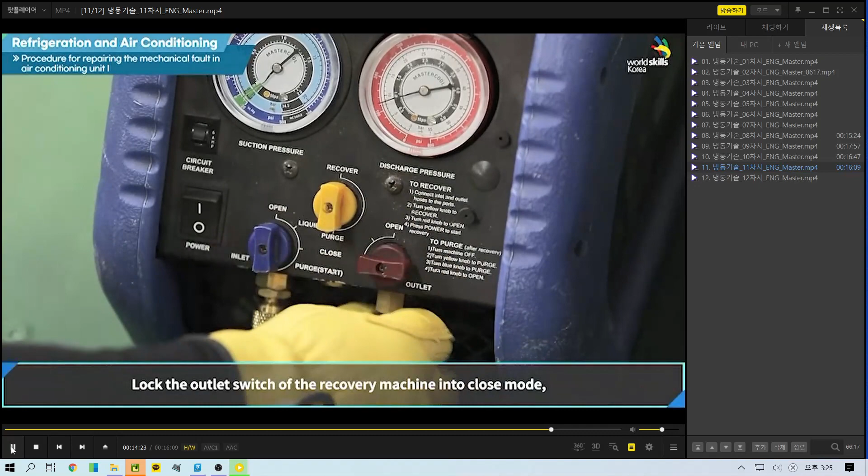After the purge is completed, close the valve of the manifold gauge connecting the recovery machine and cylinder. Lock the outlet switch of the recovery machine into close mode and close the main valve of the recovery cylinder as well. Remove the hose of the manifold gauge connected to the refrigerator.

Since the purge operation has been completed, even if the hose is removed, the amount of refrigerant released into the atmosphere will be very small.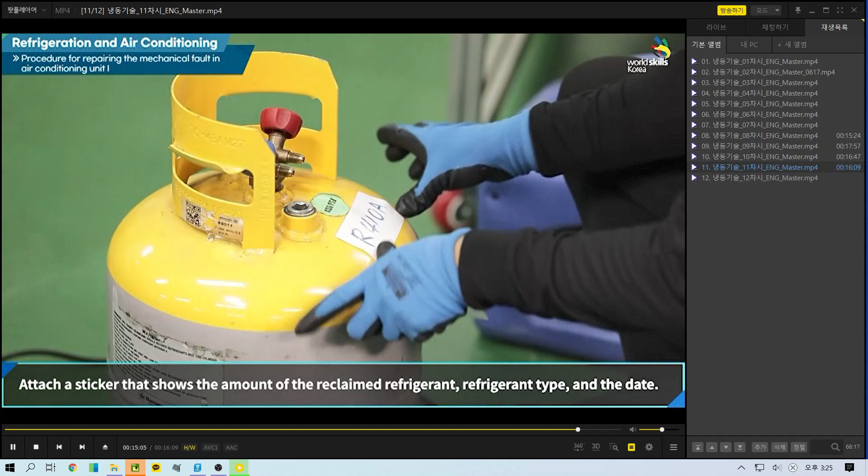Using a refrigerant scale, measure the weight of the recovery cylinder, which has just reclaimed the refrigerant. If subtracting the weight of the empty cylinder from the measured weight, the total amount of the reclaimed refrigerant can be obtained. Attach a sticker that shows the amount of the reclaimed refrigerant, refrigerant type, and the date. Cap the recovery cylinder and conduct the leakage test with a gas detector.

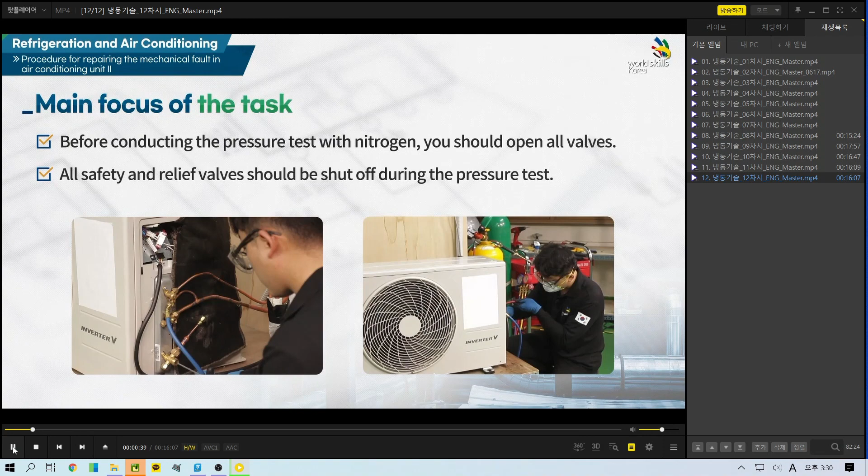Second, all safety and relief valves should be shut off during the pressure test. Third, during the pressure test, nitrogen should be pressurized safely up to the presented standard pressure to the worker.

Fourth, before the evacuation, all sorts of service and solenoid valves should be opened. Fifth, it should be verified whether the vacuum pump can be operated below 1,000 microns.

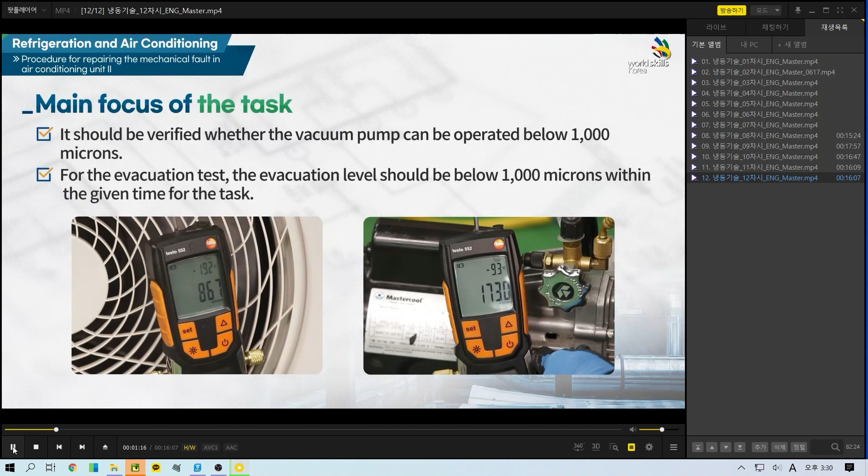Sixth, for the evacuation test, the evacuation level should be below 1,000 microns within the given time for the task. Seventh, if the vacuum pressure does not go below 1,000 microns, make sure to keep conducting the evacuation task until it reaches the desired state.

Eighth, the vacuum gauge should be installed as far away from the vacuum pump as possible. Ninth, the manifold gauge must be adjusted to zero before using it.

10th, in the case of mixed refrigerant, the liquid type must be charged with the liquid service valve or liquid receiver on the high pressure side, as much as the amount of refrigerant to be charged.

11th, when supplementing the refrigerant, it should be charged as liquid type through the low pressure side. 12th, when refilling refrigerant, inject a small amount slowly at intervals to avoid liquid compression.

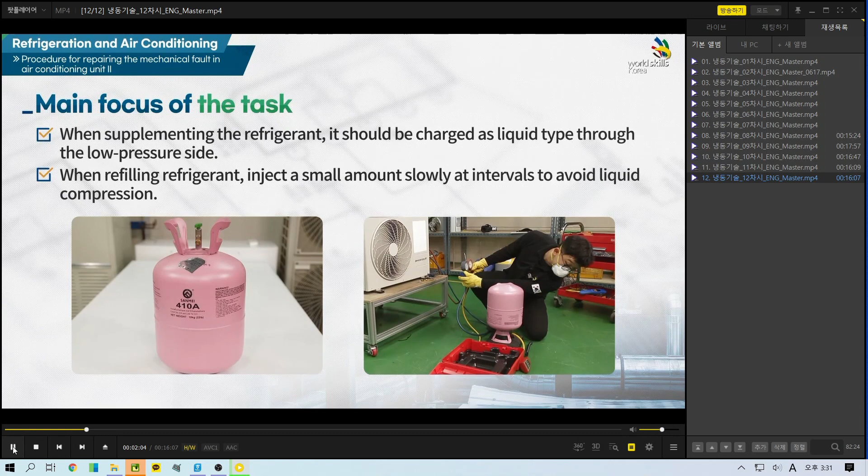13th, the loss of refrigerant during manifold gauge removal and non-condensing gas purge shall be minimal. 14th, when injecting refrigerant, all fastening parts, such as manifold gauges, shall be inspected for leakage with a gas detector after tightening and before charging refrigerant.

15th, after completing the refrigerant charging, the leakage test should be conducted on the refrigerant cylinder. Then, the refrigerant cylinder should be capped.

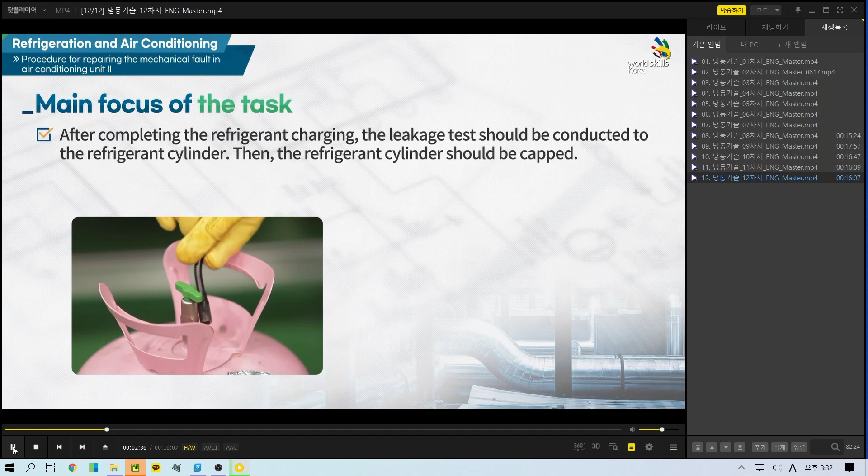16th, in the case of air conditioners, the amount of refrigerant shall be injected according to the manufacturer's manual, and the normal refrigerator shall be checked with the sight glass for the appropriate amount of refrigerant. Please check the preparations and tools for this training.

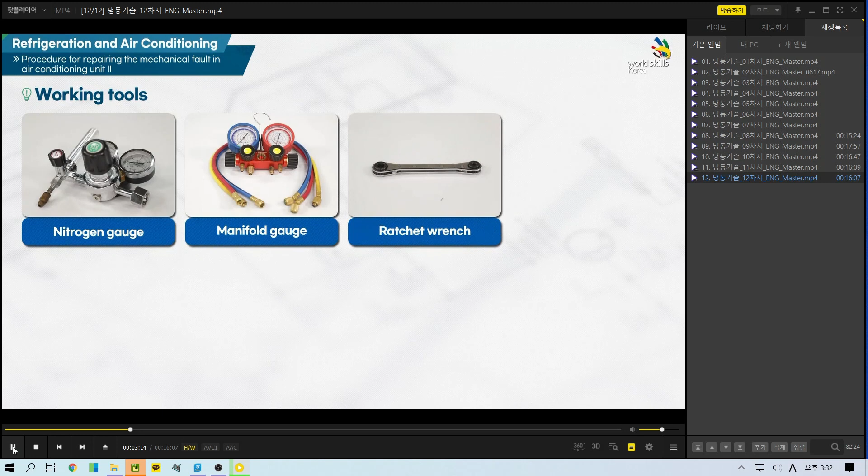These are precautions. First, be cautious of safety because the pressure test uses high pressure. Second, the pressure test shall not exceed the maximum pressure in the specifications of manufactured equipment. Third, make sure to conduct the leakage test before and after the nitrogen pressurization.

Fourth, when discharging nitrogen gas, drain it slowly at low pressure and hold the hose end firmly. Fifth, for the evacuation test, do not use the high vacuum hose that is installed to the vacuum pump. Instead, use the manifold gauge hose.

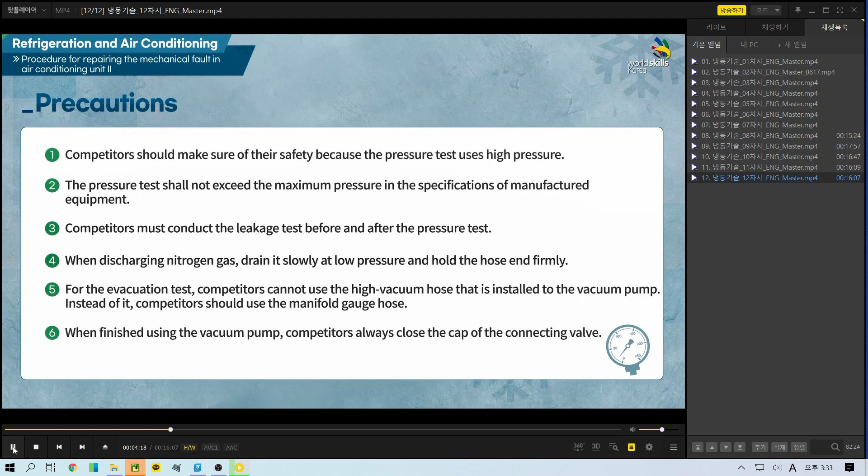Sixth, when finishing using the vacuum pump, always close the cap of the connecting valve. Seventh, to maintain the performance of the vacuum pump and extend its life, the method of use and management proposed by the manufacturer shall be followed.

Eighth, be careful not to mix non-condensing gas when injecting refrigerant. Ninth, when handling refrigerants, be careful about safety accidents. 10th, make sure not to get burnt from the low temperature of the refrigerant. 11th, make sure to wear safety gear such as safety goggles, long-sleeved clothes, and leather gloves.

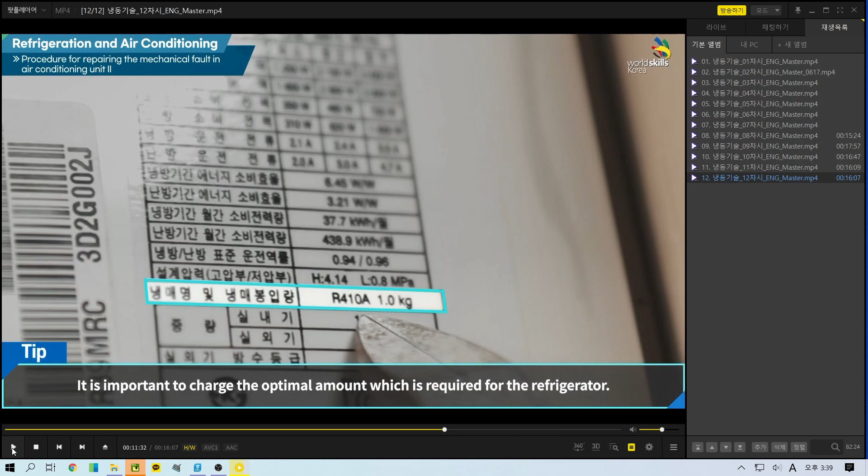As I just mentioned, if there is a sight glass on the unit or system, you can recharge the refrigerant until you cannot see bubbles on the sight glass. Next, if there is no sight glass on the system, such as the air conditioning unit, you can recharge the refrigerant according to the specified amount on the equipment. But there is some problem when there is no sight glass and no specified amount on the equipment by the manufacturer.